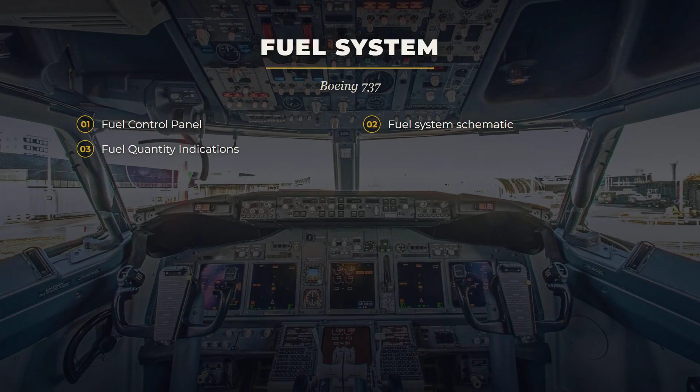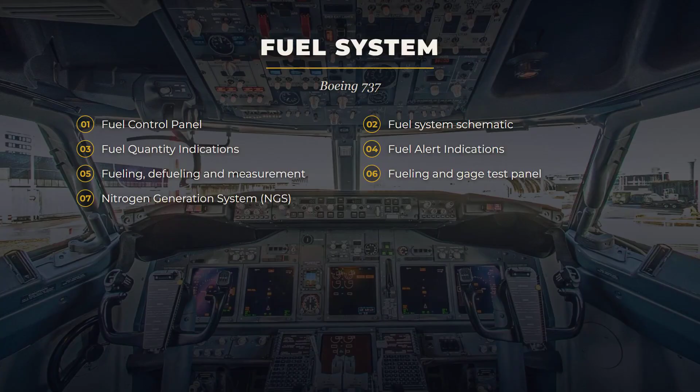Welcome to a complete walkthrough of the Boeing 737 fuel system. We are going to see, section by section, how the aircraft stores its fuel, how it pushes it to the engines, how the pilot knows at all times how much is left and where, which warnings come up when something goes wrong, and even the system that keeps the tanks from exploding. This is the index of what is coming. Let's begin.

An airplane doesn't just drink fuel on its own. You have to push it from the wing tanks to the engines, make sure it arrives with enough pressure, and be able to move fuel from one side to the other if needed. All of that is governed from a single plate on the cockpit ceiling. Let's take a look at the fuel control panel, the engine room of the fuel feed system.

Look up at the overhead panel at the front of the ceiling. There, on the forward overhead panel, you have this plate full of switches and lights. Notice that it's divided into two symmetrical halves, one for each engine. Let's go through its controls from bottom to top, following the path of the fuel.

Let's start with the heart of the panel, the pumps. These are the fuel pump switches. Fuel doesn't climb up on its own. Each tank has electric pumps that push it under pressure toward the engines. At the bottom, you have the main tank pumps, two per wing, marked aft and forward, for tanks 1 and 2. And in the middle, the center tank pumps, the L and the R.

Each switch is simple. On turns the pump on, off turns it off. And how do you know if a pump stops pushing? With these low-pressure lights, the low-pressure lights of the main tanks. They come on in amber when that pump isn't delivering pressure or when you've left it switched off. And these other ones up here are the low-pressure lights of the center tank. There's a subtlety here: if you leave a center tank pump on and it loses pressure, besides the light, you also get the cockpit's general alert, the master caution, because losing that fuel changes your flight plan.

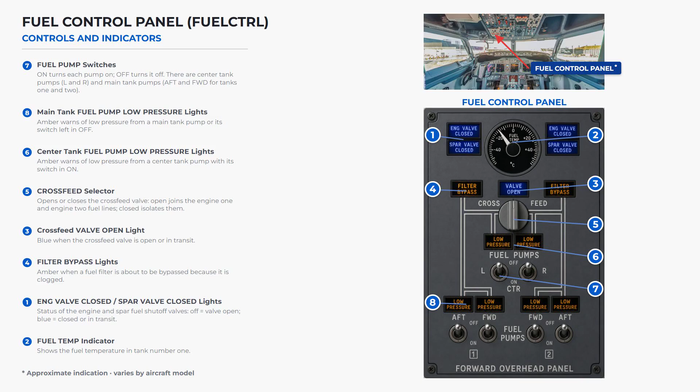And that's the fuel control panel. Pumps that push the fuel toward the engines, lights that warn you if they lose pressure, a crossfeed to move fuel from one side to the other, a dirty filter warning, shut-off valves for emergencies, and a thermometer so the fuel doesn't freeze up there. The airplane's entire fuel feed, governed from one plate on the ceiling.

In the previous video, we saw the plate the pilot uses to govern the fuel. But what's behind those switches? Which way does the fuel travel from the wings to the engines? This is the complete schematic of the system, the map of lines, pumps, and valves that feeds the airplane. Let's walk through it, following the path of every drop.

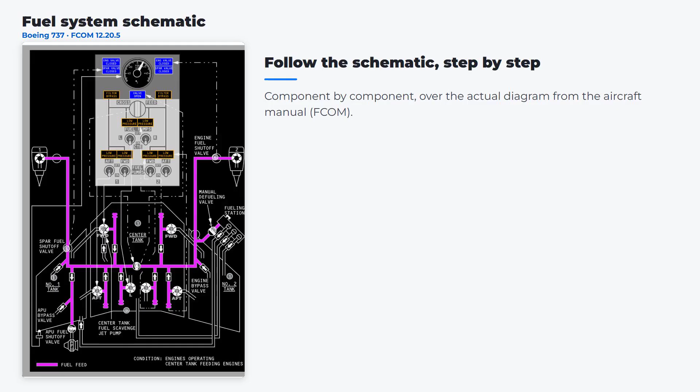The airplane doesn't carry its fuel in one single place. It stores it in 3 tanks: number 1 in the left wing, number 2 in the right wing, and a center tank in the belly between the 2 wings. Each engine drinks, in principle, from the tank on its own side, and the center tank is the big extra for long flights.

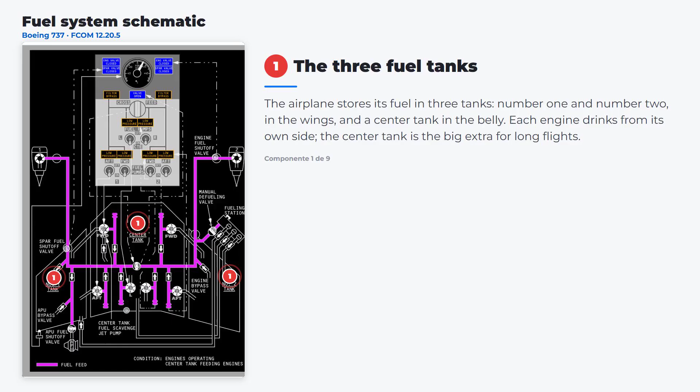Fuel doesn't climb up to the engines on its own. It has to be pushed. Each main tank has 2 electric pumps, one forward and one aft, the FWD and AFT we already saw on the plate.

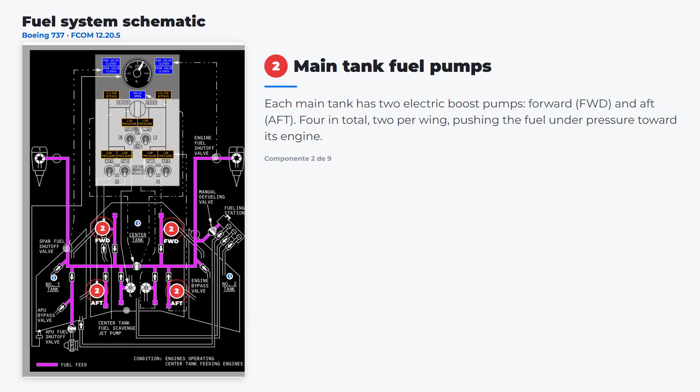They keep the fuel under pressure on its way to the engine. The center tank hides the trick of the whole system. It has its own 2 pumps, and they push with more pressure than the main tank ones. That's why, as long as there's fuel left in the center tank, the engines drink from it first and the wing tanks stay full. It's exactly what the schematic shows: engines running, the center tank feeding them.

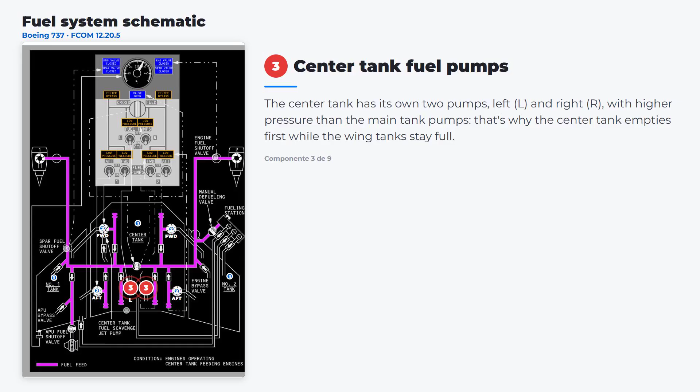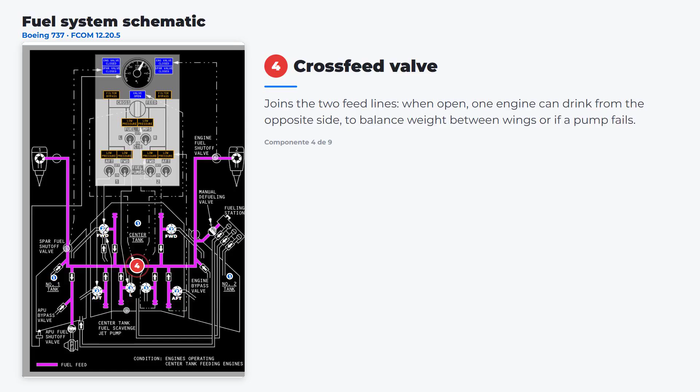Follow the pink line. From the pumps, the fuel runs along the feed lines toward each engine. Normally, each side works on its own. But in the middle, there's a valve that joins the 2 lines, the crossfeed. Open it, and one engine can drink from the opposite side to balance weight between wings or if a pump fails. Before entering the engine, the fuel passes through 2 emergency taps.

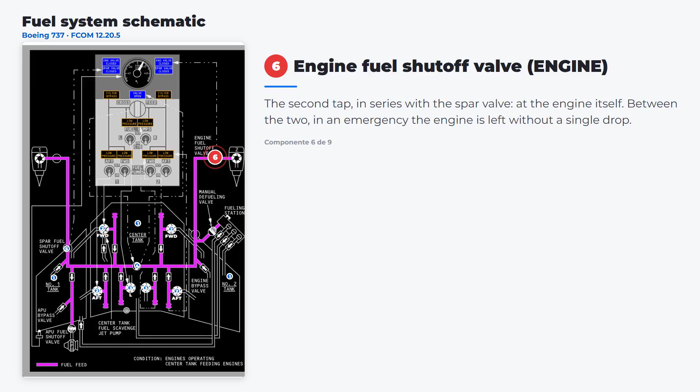They are the shutoff valves in series, the one at the wing spar, the spar valve, and the one at the engine itself, the engine valve. They close when you shut down the engine or pull the fire handle, and they leave the engine without a single drop. The engine isn't the only one that eats.

The auxiliary turbine in the tail, the APU, takes its fuel from the tank number 1 line with its own shutoff valve. It's the one that provides electricity and air on the ground with the engines shut down.

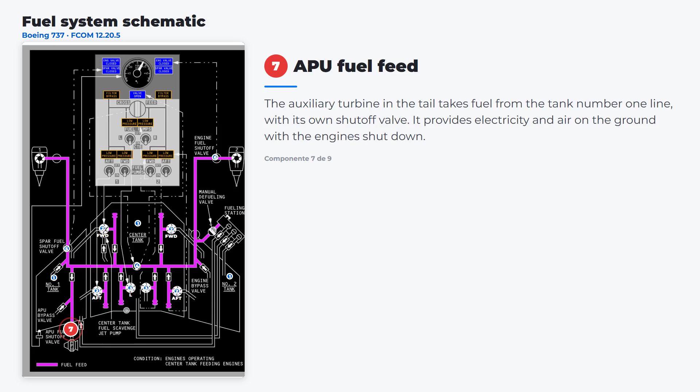And how does the fuel get into the airplane? Through the fueling station on the right wing. A single pressure connection fills all 3 tanks from the truck. Right next to it, the manual defueling valve allows the opposite, taking fuel out of the airplane when needed.

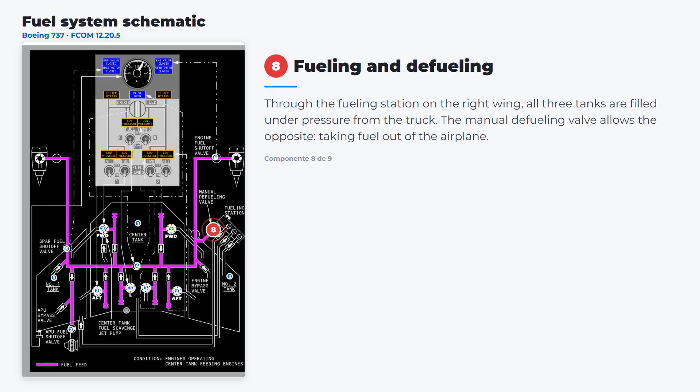There's one last, well-thought-out detail. When the center tank is running empty, a small ejector, the scavenge jet pump, collects the fuel from the bottom and transfers it to tank number 1. That way, not a single drop of the center tank goes to waste.

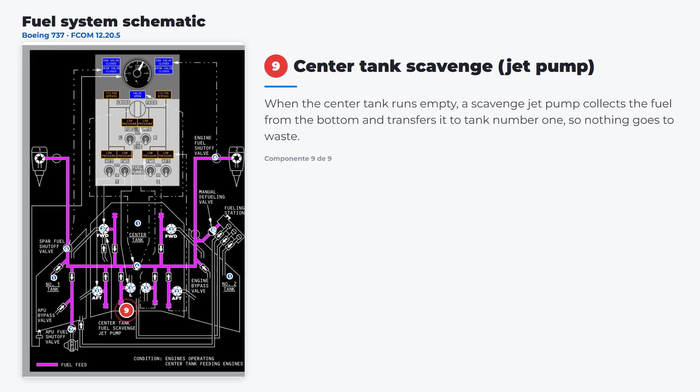And that's the complete fuel system. 3 tanks, pumps that push, the center one's harder so that fuel gets used first, a crossfeed to cross sides, shutoff valves for emergencies, a feed for the APU, the fueling station, and even a scavenge to drain the last drops of the center tank. Everything that lives behind that plate on the ceiling. Now that you know the map, every light and every switch on that plate makes sense.

Before takeoff and all through the flight, a pilot has to answer a very simple but very serious question: how much fuel do I have left? And where is it? The answer is on these 3 gauges on the upper screen. They are not there for decoration. They tell you whether you will reach your destination with margin to spare or whether it is time to divert.

Look down at the center of the instrument panel at the upper screen. There, on the upper display unit, you will find the fuel quantity indications. You will see 3 gauges in a row, and that is no coincidence, one for each tank. Let's learn to read them.

Let's start on the left. This is the tank number 1 indicator, the one for the left wing. Notice that it gives you the figure in 2 ways at once. The big white number is the digital readout, the exact kilos left in that tank, and the white arc around it is the analog readout, so you can tell at a glance whether the tank is full, half full, or almost empty without reading the number.

Everything it shows is usable fuel, the fuel the engines can actually burn. In the middle, you have the special one.

This is the center tank indicator, the CTR, a tank that sits in the body of the airplane between the two wings. It is normally the first one to be used because you want to burn off that weight in the middle first and keep the wings loaded as long as possible, since they handle the stress of flight better that way. When the center tank reaches zero, the airplane switches over to drinking from the wing tanks.

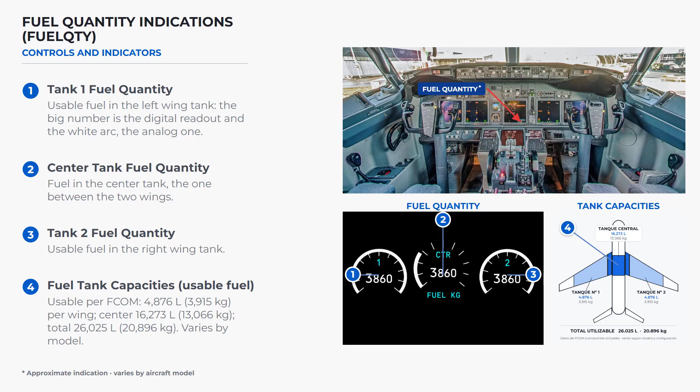And that is the fuel quantity indications. 3 gauges, 1 per tank, each with its exact digital figure and its arc for the quick glance, all in kilos. The center tank that burns first, and the 2 wing tanks that must stay balanced. 3 numbers the pilot never loses sight of for the whole flight.

The same gauges that tell you how much fuel you have left have a second job, an even more important one, warning you when something goes wrong. And they do it in a very clear language. When everything is fine, the numbers are white. But as soon as a problem shows up, that gauge turns amber and spells out what is happening.

Let's look at the 3 warnings the fuel system can give you. We are on the same upper screen as before, the one with the 3 gauges. Here, on the upper display unit, is where the fuel alerts appear. Notice that the warning does not come up on a separate screen. It is the gauge itself that changes color and writes the word right on it. Let's go through all 3.

The first one is the most obvious. It is the low alert, from low, not much left. When a main tank, the one in a wing, drops below 907 kilos, that gauge turns entirely amber and displays low. It is the airplane's way of telling you, careful, this wing is running low. And it does not go out the moment you gain a little back. To clear the warning, you have to recover quite a bit more, 1,134 kilos, so it does not keep flicking on and off on you.

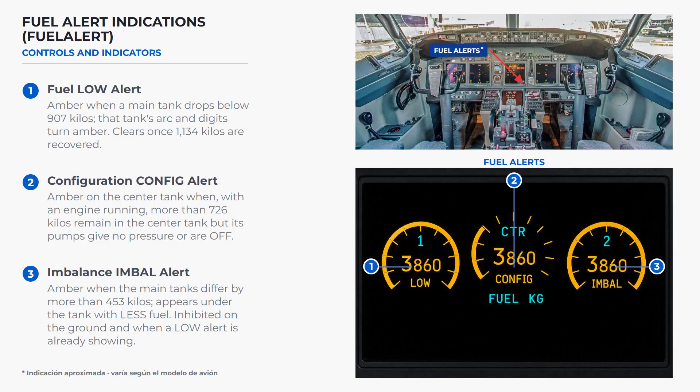And those are the 3 fuel warnings, all in amber and all written right on the gauge. Low, when a wing is running low. Config, when there is fuel in the center tank that is not reaching the engines. And imbal, when one wing weighs quite a bit more than the other. 3 words the pilot understands at a glance, and that tell them exactly what to do.

A tanker truck loads several tons of fuel into a 737 in just a few minutes, and nobody has to climb onto the wing with a hose.

With a single-point refueling system, all tucked away under the right wing. Let's open that little access door and see where the fuel goes in and how it's all controlled from outside. All of this is outside the airplane, on the leading edge of the right wing, behind an access door that opens from the ground. Inside is the fueling station, the receptacle the fuel enters through, the valves that distribute it, and the controls to manage it all. Let's go piece by piece.

First, the front door. This is the fueling receptacle, the single inlet through which all the fuel enters. The operator connects the truck's hose here, and the fuel flows in under pressure through this one point. From there, once inside the airplane, it's distributed to the tanks. One single point to fill everything, fast and safe.

But the fuel doesn't just go to any tank. It has to be directed. That's the job of the fueling valves, one per tank. With the battery on and the door open, fuel pressure itself opens the right valve and lets the fuel into that tank. These are the valves that, commanded from the panel, decide where every drop ends up.

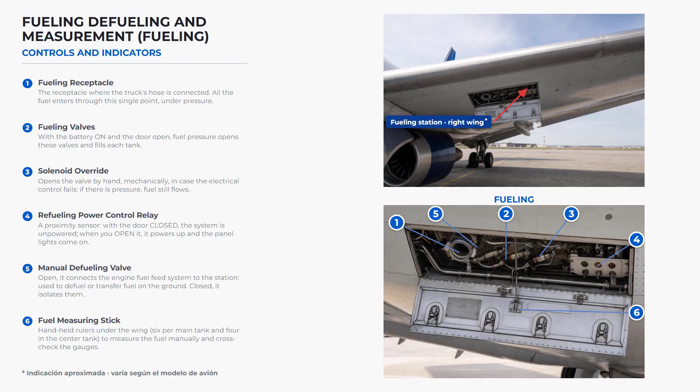And that's the 737's fueling station. One single receptacle through which all the fuel comes in. Valves that distribute it among the tanks. A mechanical backup in case the electrics fail. A door that powers up the system when you open it. A valve for defueling. And even handheld rulers to measure fuel the old-fashioned way. All under the wing to fill and empty the airplane from the ground.

Refueling an airplane is nothing like filling up your car. There's no filler cap on top where you stick the hose. The fuel goes in from below through a single point under high pressure, and everything is controlled from a small panel hidden in the edge of the wing. This is the panel an operator uses to fill the airplane without ever setting foot in the cockpit.

And here's the first surprise. This panel is not in the cockpit. It's outside, on the leading edge of the right wing behind an access door. It opens from the ground with the airplane parked, and from here, the entire fuel load is managed. Let's look at its controls.

Let's start on the left. This switch is spring-loaded and always returns to the center, to off. Up, in test gauges, it runs a check.

It verifies that the fuel quantity indicators actually work before you trust them. Down, in the fuel door switch bypass, there's an emergency trick. If the system doesn't power up on its own when you open the door, this position powers it manually so you can still refuel.

Right above it, you have a row of blue lights. These are the fueling valve position lights, one per tank. Their logic is very handy: they light up blue while that tank's fueling valve is open and the tank isn't full yet. And what happens when the tank fills up? The light goes out on its own.

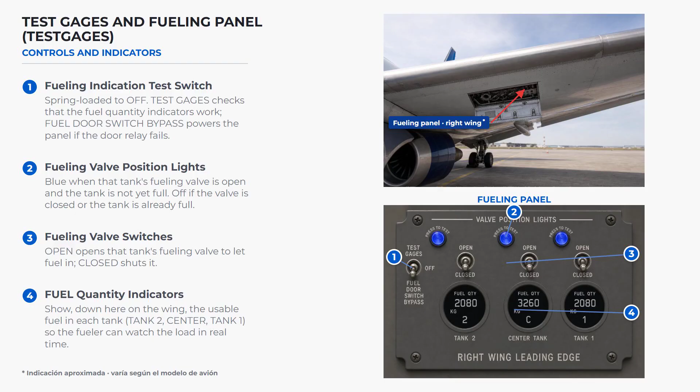And that's the wing fueling panel: a switch to test the indicators and to provide emergency power, blue lights that tell you which tanks are still filling, switches to open and close the flow to each tank, and the same gauges from the cockpit repeated down here. All so the airplane can be filled from the ground through a single point without setting foot in the cockpit.

Inside a half-empty fuel tank, there isn't just liquid, there are vapors. And those kerosene vapors, mixed with air, can become explosive. For years, that was a real risk in aviation. The solution modern airplanes carry is as elegant as it is discreet: fill that empty space with a gas that doesn't burn. That's the job of the nitrogen generation system, one of the most important safety systems that almost nobody ever sees.

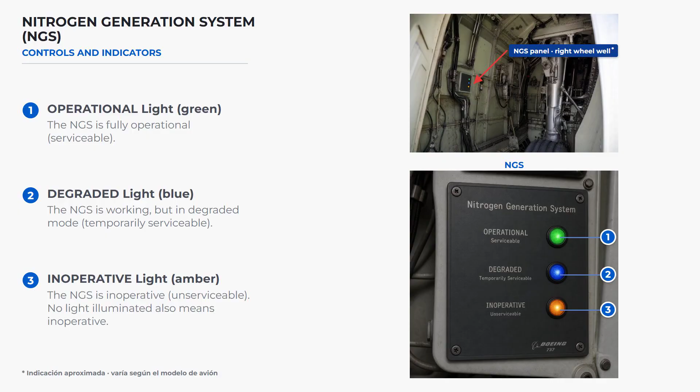And that's the nitrogen generation system, a system that fills the center tank with a gas that doesn't burn so its vapors can't explode, signaled by 3 lights in the wheel well, a safety traffic light for maintenance. Green, all good. Blue, running below par. Amber, or no lights at all, inoperative. Invisible from the cockpit, but one of the systems that gives you the most peace of mind.

And that wraps up the 737 fuel system, section by section.